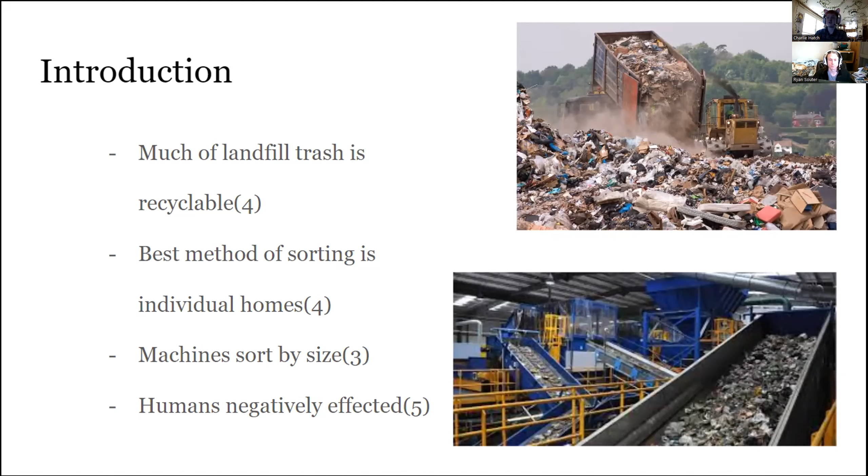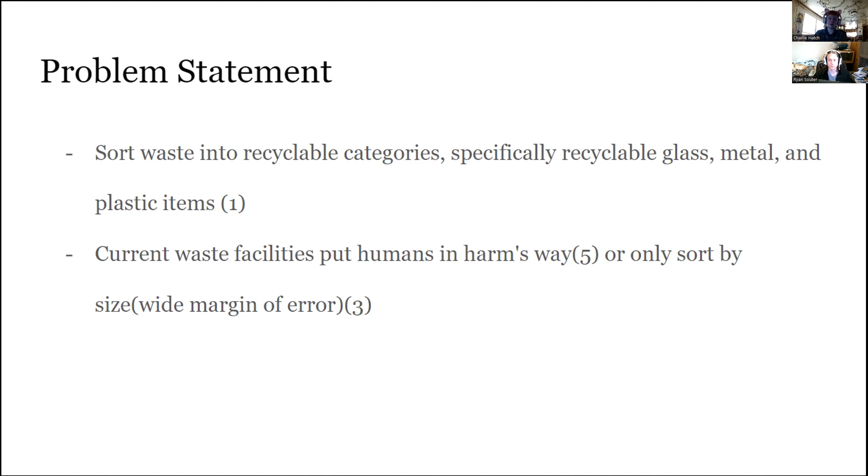So the requirements for this project are that we need to be able to sort waste into recyclable categories: glass, plastic, metal, and not put humans into that harm's way, and have a much lower margin of error than current methods have. And so the design requirements reflect that.

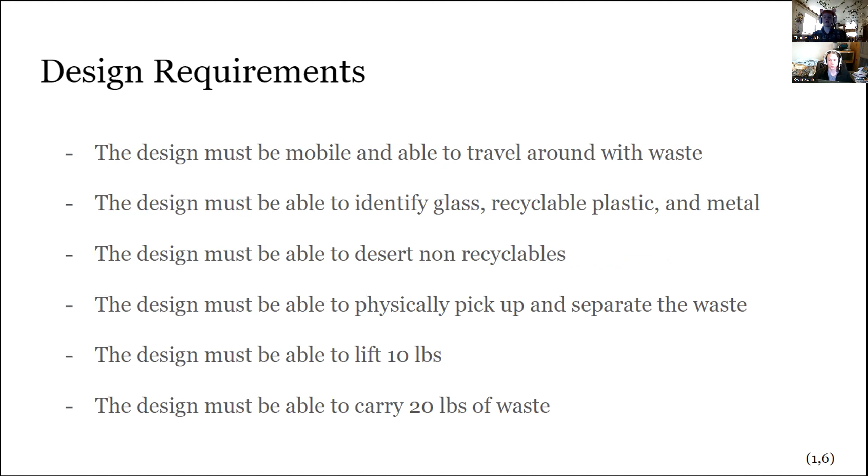It needs to be able to travel with the waste so that it can actually bring the different categories back to that collection point. It needs to be able to identify those main three categories that can be re-recycled: glass, plastic, and metal. And it needs to be able to leave those non-recyclables like food or paper, which is recyclable, but not very many times, behind.

So the human impact of this would be pretty vast. It would be marketed towards active waste facilities that already are sorting those things, just at a less precise level. It would be very attractive to green politicians and other people who want to improve their environmental image. It could also be modified for home use, so those people who don't sort their garbage because it's too much effort could begin to do that a lot more easily.

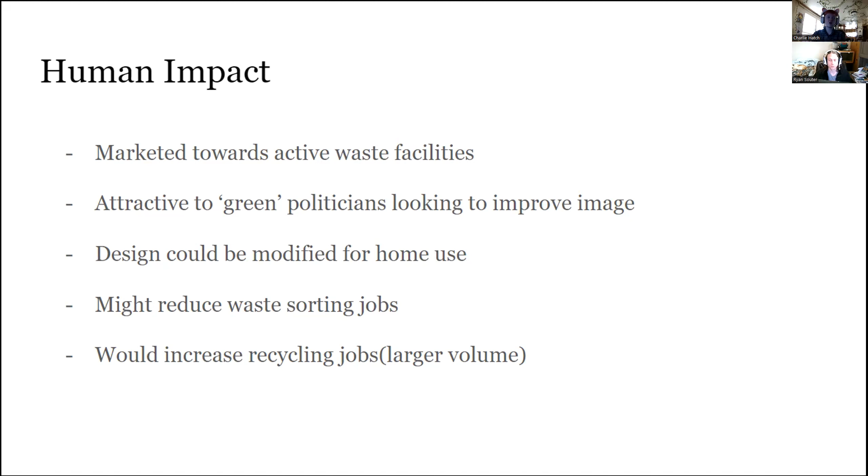It would probably reduce those jobs in waste sorting. However, that wouldn't necessarily be a bad thing due to the fact that those are very harmful on people's health. And it would increase recycling jobs as a larger volume of recyclables are able to be processed.

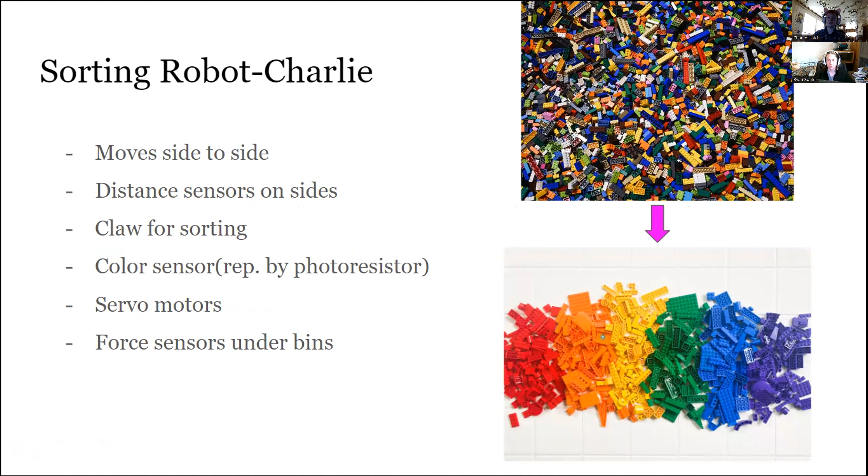So the sorting robot, as aforementioned, would move left and right over a conveyor belt. It has distance sensors on the side to make it be able to see where the wall is and when it has to turn around. It has a claw for sorting, and that claw has a color sensor that's going to be represented by a photoresistor because the color sensor that we are referencing is not available in Arduino. And it has servo motors in the claws to control them, and force sensors under the bins to let Ryan's robot know when one of the bins is full. I was only able to have one due to limitations, but there would be three in a finished product.

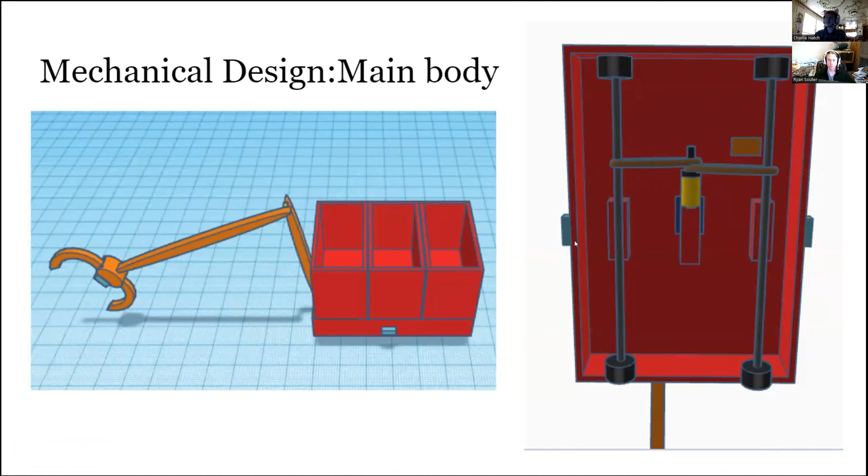So this is a mechanical design. You can see that there is a claw and three different bins. The claw will go to different angles to be above those bins and then drop the trash into those bins. On the underside, right here, we have an Arduino, the 9-volt battery, a gear motor that only goes left and right in those two dimensions. There are also these two blue things on the sides that represent the distance sensors.

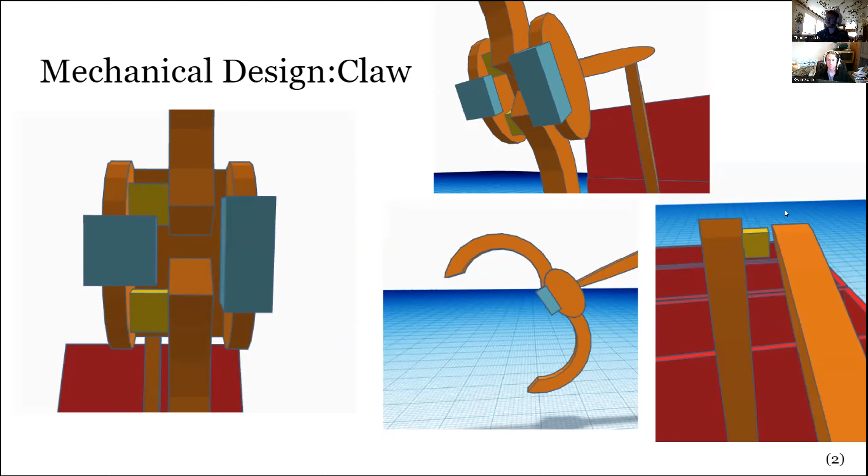So the claw is just a little bit more complicated. This is the overall claw. You can see these two boxes are the two sensors. One is going to be a distance sensor, one is that color sensor. The yellow boxes are servo motors. So when it sees something, the servo motors change their angle and grab the trash. And then the arm right here in the elbow, there's also a servo motor, and that's going to move the arm to different angles to drop the trash off.

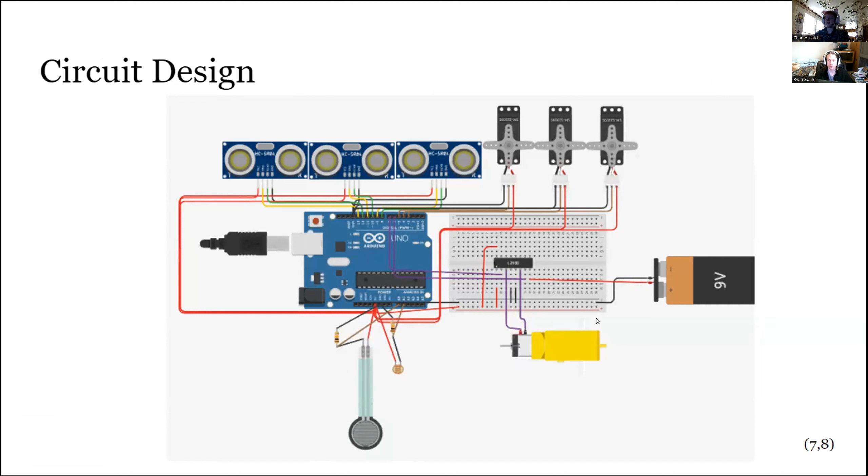Right, and now I get to show you the real deal.

All right, so here we have my code. We've got... oh wait, hang on, need to show you my activity chart first, don't I?

So basically the robot is just going to check each wall, see which side the wall is on, because it's going to start on one side. If it's on the left, it'll move right. If it's on the right, it'll move left. And the code is the same either way.

So it'll then check the weight. If the weight is high enough, it will signal Ryan's robot, and Ryan's robot will come over. So that's the output. The inputs are weight. When the weight is 0, it'll begin going again after Ryan's robot has replaced the bins.

It will continue to check if the distance by the claw is close enough that there's something within range. If it is, it'll close the claw, check the color, move it to its respective bin, and drop it. After that, it will go left or go right, depending on which side it was going. And then it'll check the weight again and continue going through that.

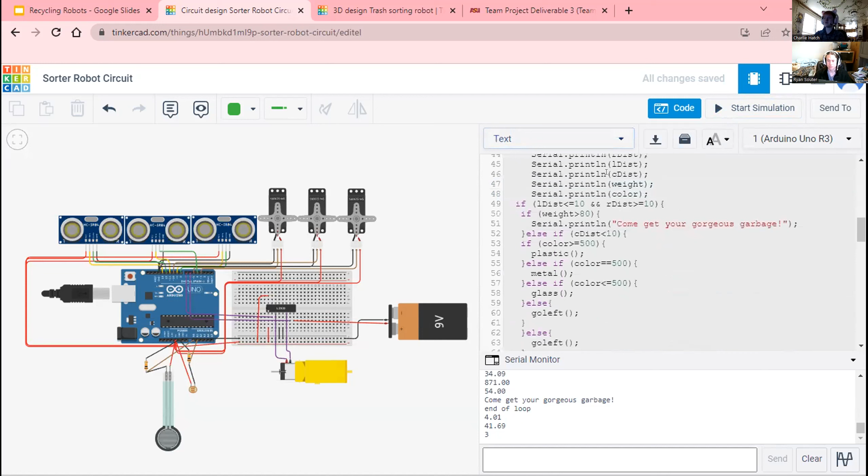So I've got all my inputs here, got the setup with all the pins and the servos, and the different distance functions are at the end. And it will continue to print all of the inputs that it gets from its environment.

So basically, this is the left function and the other one is the right function. They're the same other than which direction they're going. So it will check all of these inputs, and then you have all of the different formulas.

So here we can see the thing actually working. Currently, the photoresistor is below a certain level. Let's see, if we move the claw closer, it will start sensing, okay, it's below the level, which means it's glass, I believe, and you can see the arm servo moving and the claw servos moving to the correct positions.

And if I move it higher, you can see that the arm servo is going to move to a different angle, so it's a much shallower angle. And then if I move this out again, it knows that there's nothing by the claw, so the servo motors stop moving.

And then currently the motor is going negatively because it's going in one direction. When I move my things the other way, it will start going positive because it's going in the positive direction.

All right, and then if I move my weight higher, you can see that it's stopped and it continues to print, come get your gorgeous garbage, to Ryan's robot. And when it goes down again, there we go, and now my motor is going again.

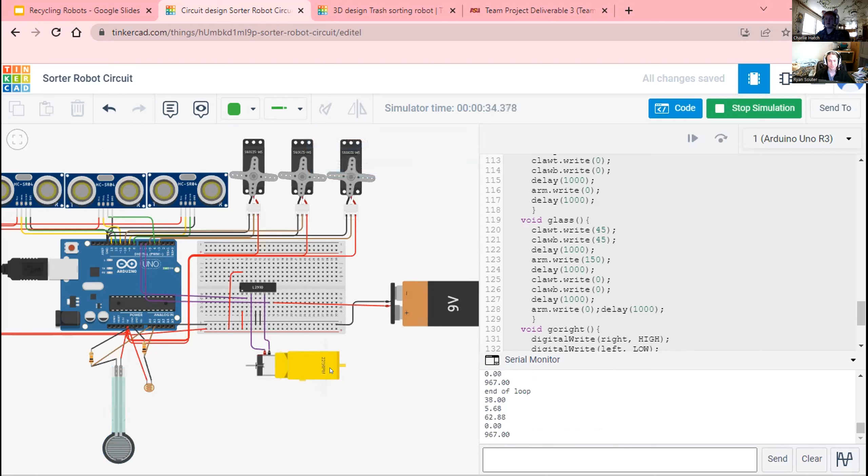It has the distance sensor so it can avoid obstacles while it's traveling between the sorter robot and the collection point. I have an IR sensor because I used an IR remote to sort of show the different inputs that it would be getting from the sorter robot. And then a photoresistor as a stand-in for a wavelength sensor.

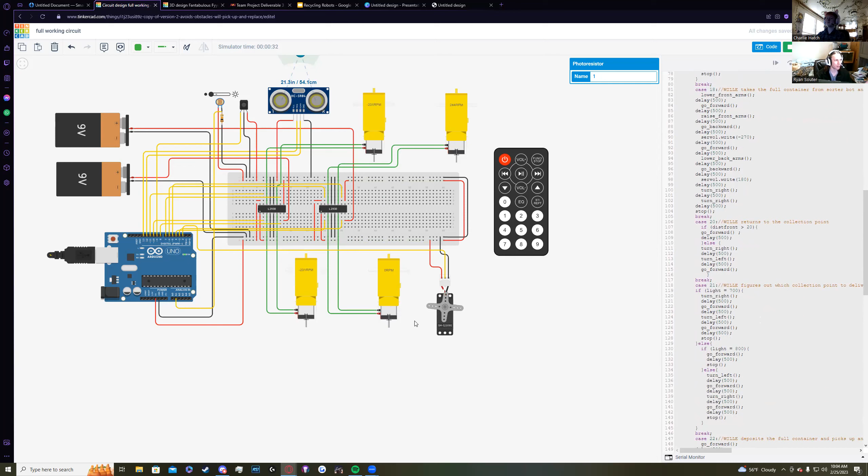The last behavior is it depositing its full container, rotating its midsection around here to pick up the new empty container, then resetting and getting ready to go back to the sorter robot next time it has a full container.

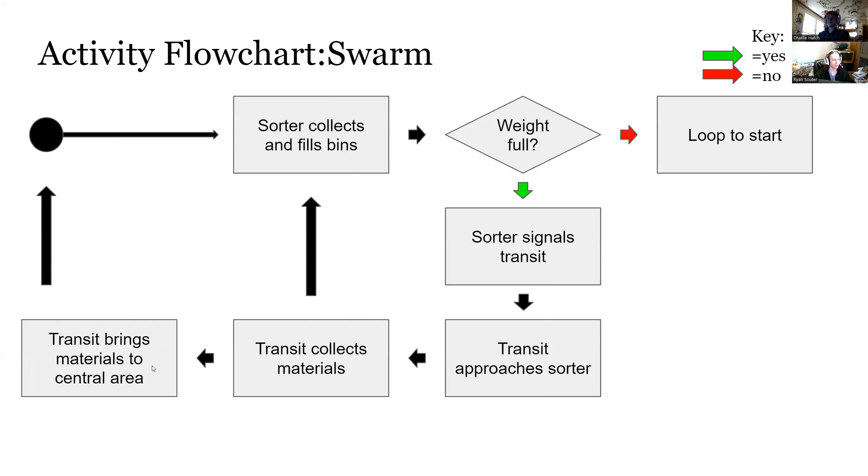In summary, like we mentioned earlier, this would eliminate a lot of the dangerous jobs and introduce even more jobs to maintain and repair these new robots. It would also have a positive environmental impact just because it increases the effectiveness with which we can sort through waste.

As far as improving it, one of the biggest improvements would be that our design works on a conveyor belt system—the sorter robot just travels along the conveyor belt and sorts through waste. But if you could get it to freely roam around a landfill and sort through it as it goes, instead of being fed waste through the belt, that would make it more efficient and more effective.

The best way to sort through waste is for each individual to police themselves and sort through the different types of waste before it even gets sent to the landfill. But these robots would help bridge that gap until that practice becomes more widespread.